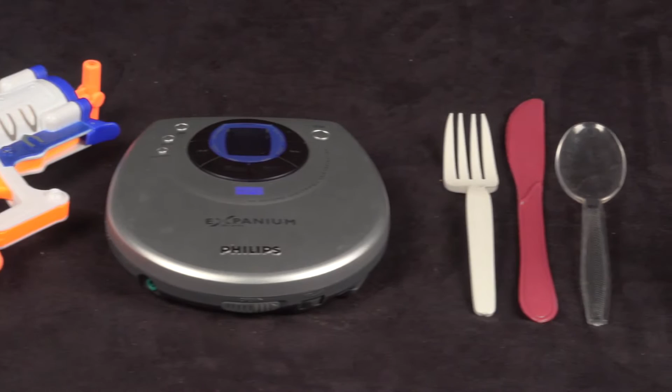Injection molding is the most common method for mass manufacturing plastic products. Examples include chairs, toys, cases for consumer electronics, disposable cutlery, and my favorite, Lego bricks.

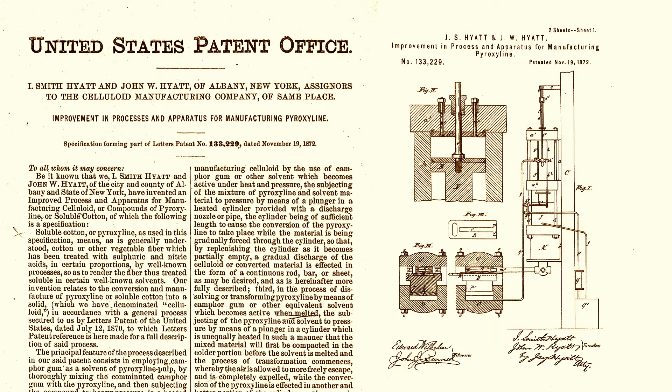Injection molding was invented to solve a problem for billiards. In the 19th century, billiard balls were composed of ivory harvested from the tusks of African elephants. This devastated the elephant population, so a billiards manufacturer offered a $10,000 prize for a replacement for ivory. This spurred John Wesley Hyatt to develop one of the first plastics, celluloid, to create billiard balls. He patented an apparatus for molding products from celluloid. This apparatus was the birth of plastic injection molding.

In principle, injection molding is simple. Melt plastic, inject it into a mold, let it cool, and then out pops a plastic product. In reality, injection molding is an intricate and complex process.

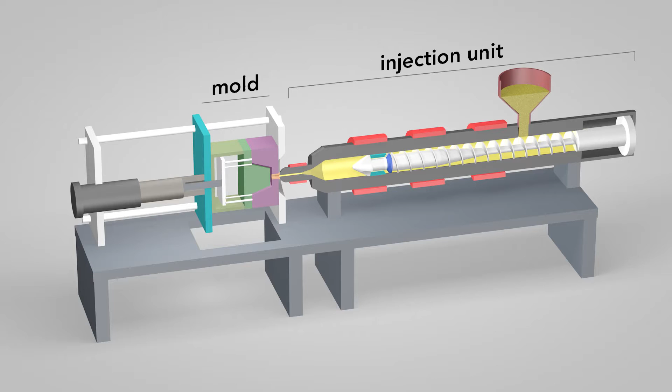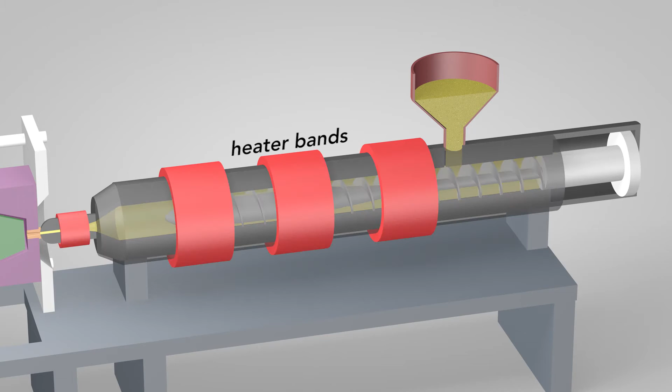An injection molding machine has three main parts: the injection unit, the mold, and the clamp. Plastic pellets in the hopper feed into the barrel of the injection unit. Inside the barrel, a screw transports the pellets forward. Heater bands wrapped around the barrel warm up the plastic pellets. As the pellets are moved forward by the screw, they gradually melt and are entirely molten by the time they reach the front of the barrel.

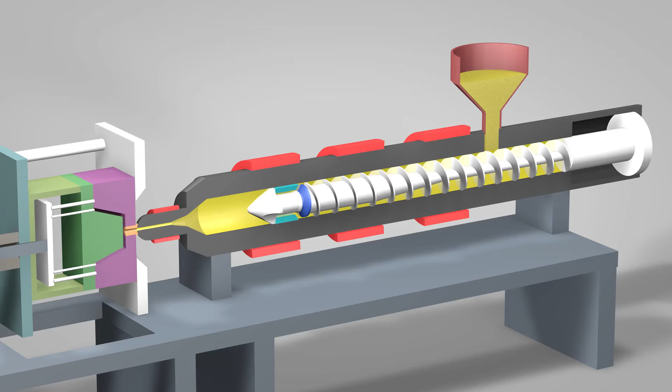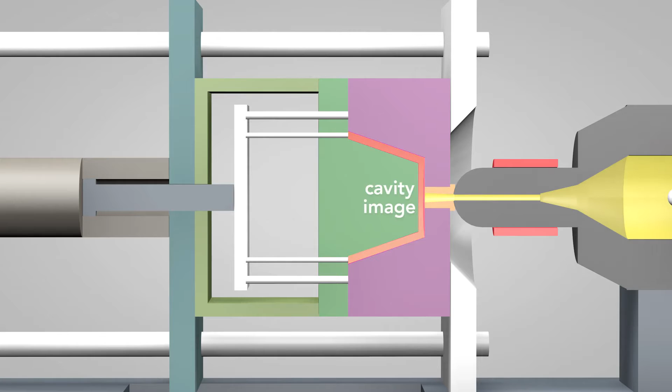Once enough molten plastic is in front of the screw, it rams forward like the plunger of a syringe. In a matter of seconds, the screw injects the molten plastic into the empty part of the mold called the cavity image. The plastic solidifies in under a minute. The mold opens and the part is ejected. The mold then closes and the process repeats.

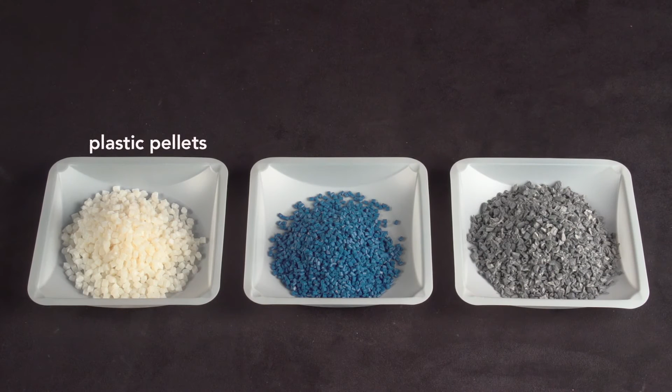All injection molded objects start with these plastic pellets, which are a few millimeters in diameter. They can be mixed with small amounts of pigment called colorant, or with up to 15% recycled material, then fed into the injection molding machine.

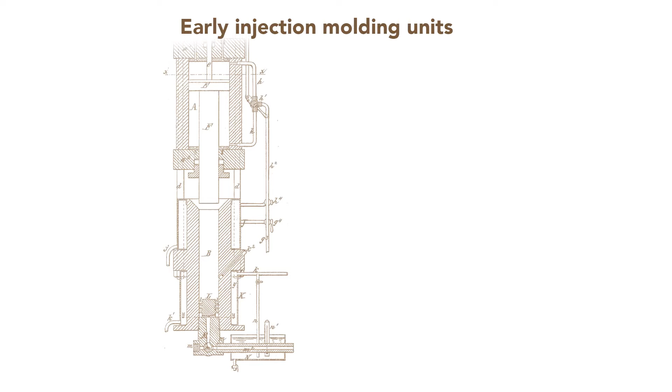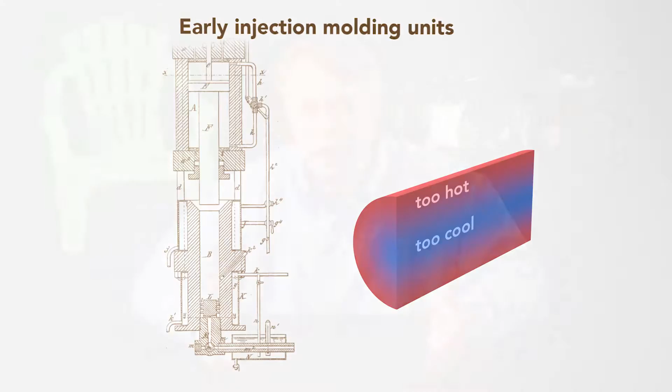Before the mid-20th century, injection molding machines used only external heating of the barrel to melt the plastic before a plunger injected the molten material. But because plastic conducts heat poorly, the temperature was uneven in the barrel. Either the middle was too cool and not fully melted, or the outer regions were too hot and degraded the plastic. The solution was this: the reciprocating screw, often regarded as the most important contribution that revolutionized the plastics industry in the 20th century.

In the earlier plunger-style machines, plastic filled completely the cylindrical barrel. But as I showed you, the plastic was not at a uniform temperature. The reciprocating screw overcomes this in three ways.

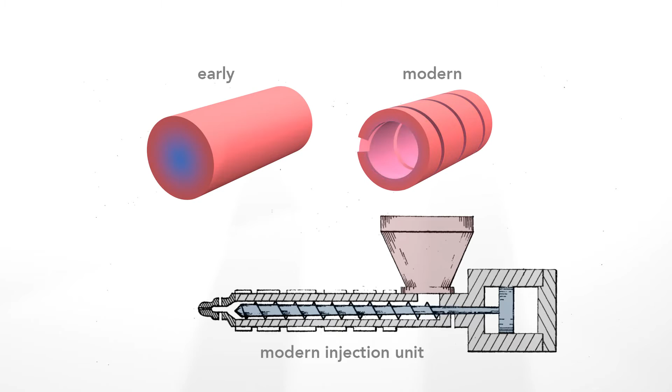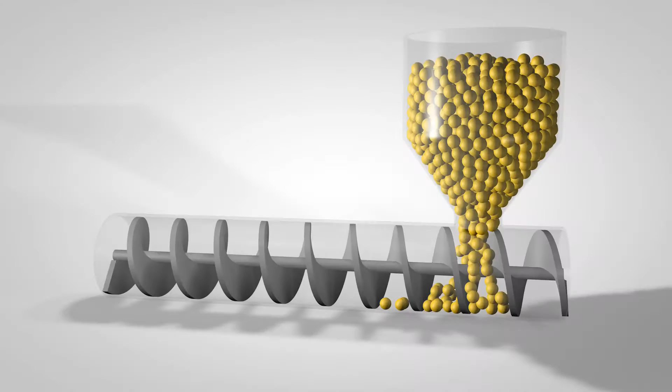First, in modern units, the plastic fills only the space around the shaft of the screw. This eliminates the cooler central region, leaving a thinner, evenly heated layer of plastic. Second, the screw has flights that wrap around the shaft. As the screw rotates, the flights transport the raw material forward through the barrel. The flights also serve to mix the plastic. The screw action agitates the melting pellets within the flights to create a uniform mixture.

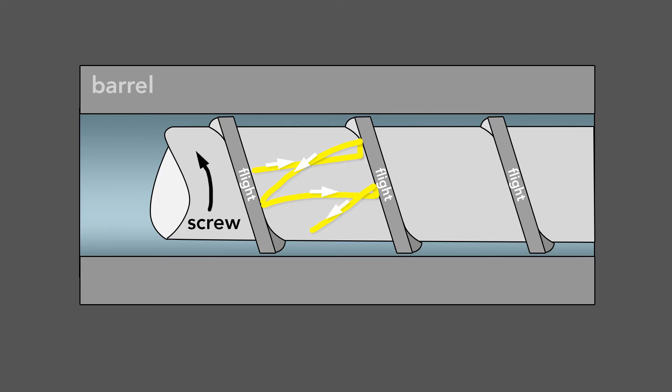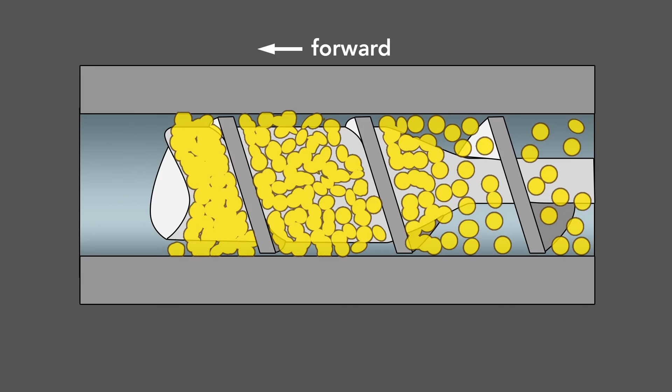Third, the screw action itself heats the plastic throughout. The shaft's diameter increases along the screw so that the distance between the wall and the shaft decreases. The flights then squeeze out air as they move the plastic forward, and they shear the pellets and press them against the barrel's wall. This shearing creates friction and so heats the plastic throughout. This screw-induced shear supplies a majority of the heat needed to melt the plastic, between 60 and 90%, with the rest from the heater bands.

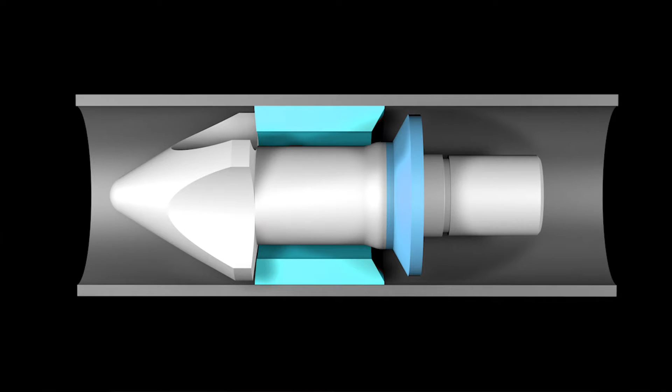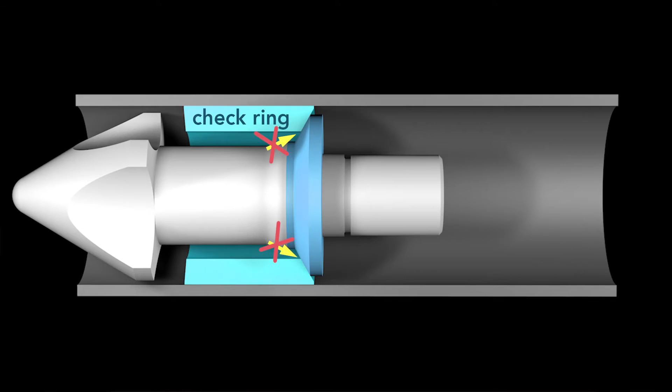The molten plastic flows past the front of the screw through indentations or flutes. When there's enough plastic to fill the mold at the front of the screw, it rams forward like a plunger, injecting the plastic into the mold. The plastic cannot flow backwards because when the screw pushes forward, a check ring is shoved against a seat ring to block the backwards movement of the molten plastic. This forces the plastic into the mold.

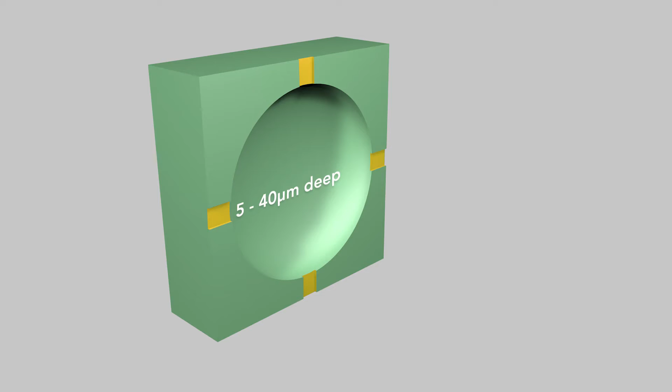Initially, the cavity image is filled with air. As the molten plastic is injected, it forces air out of the mold, which escapes through vents. These vents are channels ground into the landing surface of the mold. They're very shallow, between 5 and 40 microns deep. The plastic, which has the consistency of warm honey, is too viscous to flow through the narrow vents.

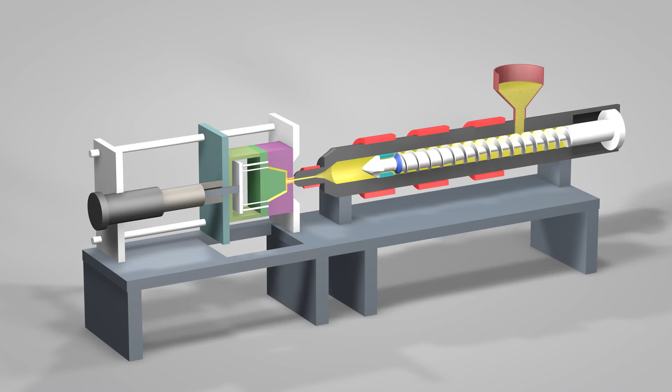To speed the plastic solidification, coolant, typically water, flows through channels inside the mold just beneath the surface of the interior. After the injected part solidifies, the mold opens. As the mold opens, the volume increases without introducing air, which creates tremendous suction that holds the mold together. So at first, the mold slowly opens several millimeters to allow air to rush in and break the vacuum, and then the mold quickly opens the rest of the way so the part can be removed.

These precision machined steel molds can cost hundreds of thousands of dollars. Removing the part from the mold can be difficult.

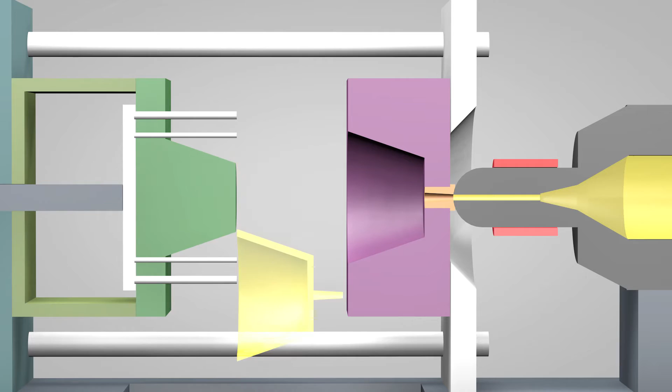When the plastic cools, it shrinks and becomes stuck tightly on the core half of the mold. Molds have built-in ejector pins that push the part off the mold. The ends of the pins sit flush with the core half of the mold, but are not perfectly aligned. Sometimes they protrude or are indented slightly.

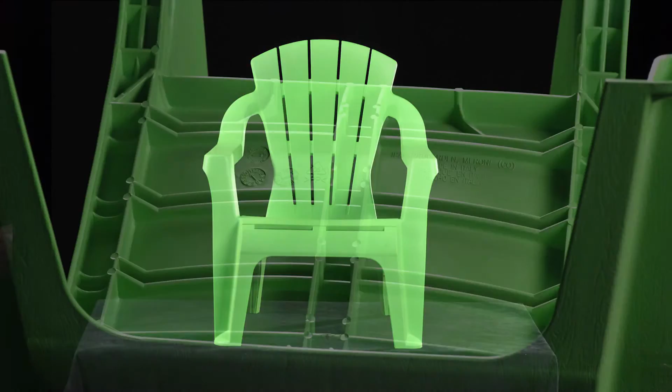So, if you look closely, you will see circular ejector pin witness marks on molded products. For example, this chair, on its bottom, has an array of witness marks.

When the part drops from the mold, an operator has to remove the sprue, that section of plastic that connected the injection unit to the mold. Sprues are manually twisted or cut off the part. Sprues are attached to objects only in molds that make a single part at a time, like a chair.

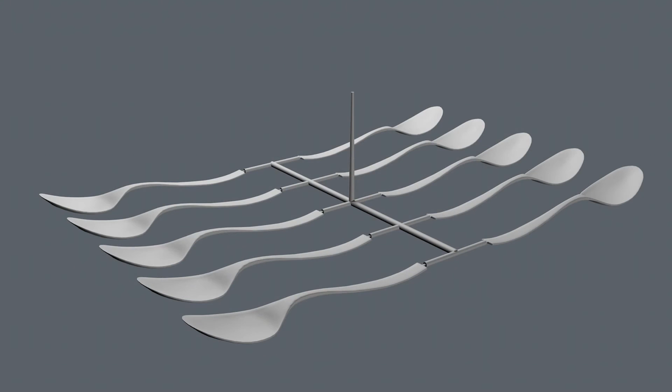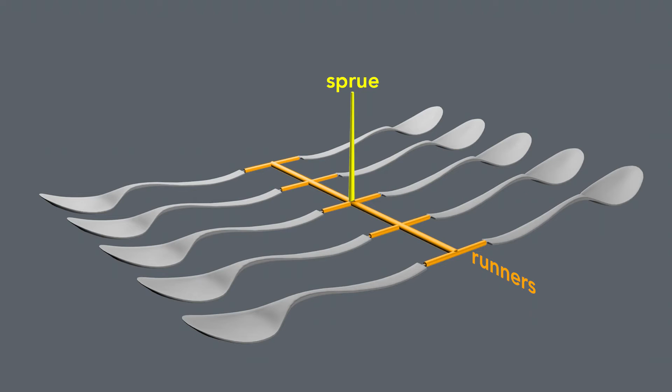Smaller objects are made in multiples in a single mold. In these, the sprue connects not to the part itself, but to a network of distribution tunnels called runners. The runners fan out from the sprue and connect to each cavity in the mold via a small, typically rectangular, entrance called the gate. You can see the gate on plastic cutlery.

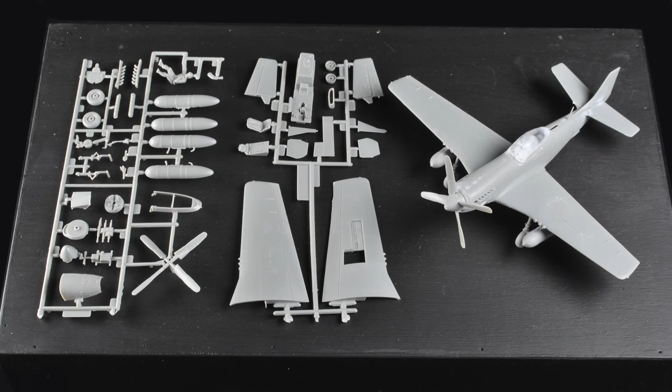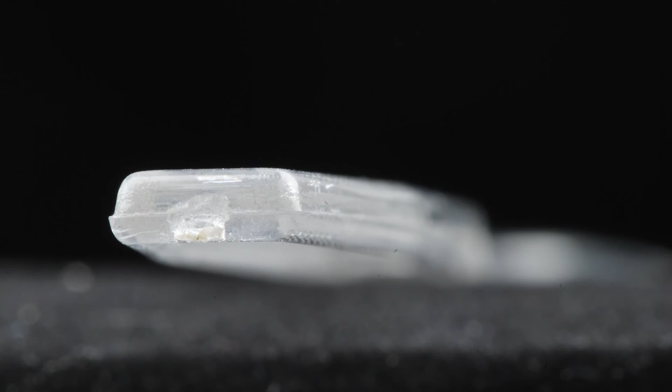The parts for model planes typically come still attached to their runners. Molds always have at least two parts, and where the parts of the mold meet is called the parting line. Here on this piece of cutlery, you see the parting line along the side of the fork.

When mold halves close, they are never perfectly aligned, nor do they have sharp corners. This creates a noticeable parting line on the molded object.

Another very important aspect of mold design is the draft angle. If a part has walls that are exactly 90 degrees, it will be very difficult to eject because its inner walls will scrape the core half of the mold. Also, the vacuum will be difficult to break because air cannot readily enter.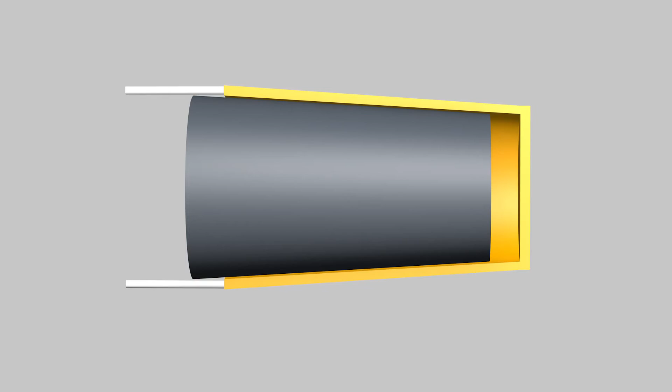However, if the walls are slightly tapered, even just 1 or 2 degrees, it becomes much easier for the part to be removed because once the part moves slightly, the walls are no longer in contact with the core half and air can rush in.

One impressive example of injection molding is the Lego brick. You can see the injection point in the middle of a stud, but this is not from a gate or a sprue. The Lego molds use hot runners.

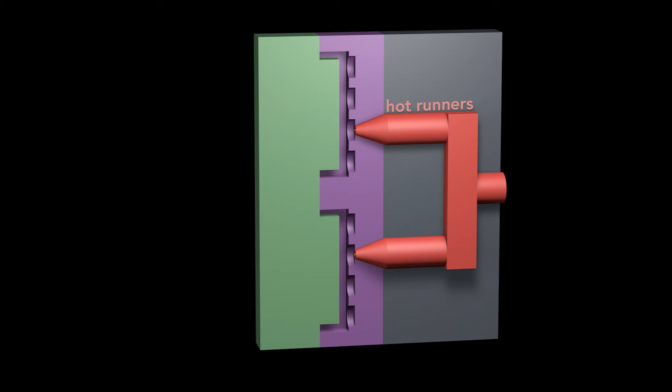Hot runners are a heated distribution network. This keeps plastic inside the runners molten while the plastic in the mold solidifies. This leaves no gates or sprues to be removed. The molded bricks are ejected, ready to use. The downside is that this setup is more expensive than a traditional cold runner system.

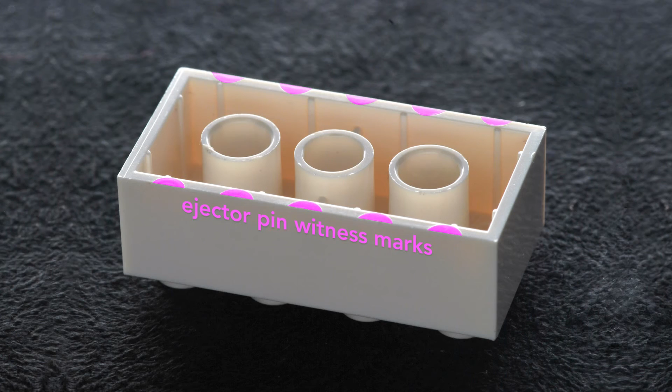On the bottom edge of the brick, you can see ejector pin witness marks. And what's most clever to me is where Lego designs their draft angle.

The outside of a Lego brick must be square. So if you cut a Lego brick in half, you can see that these inner supports are thicker at the top than at the bottom. There's a draft angle of about 1.5 degrees.

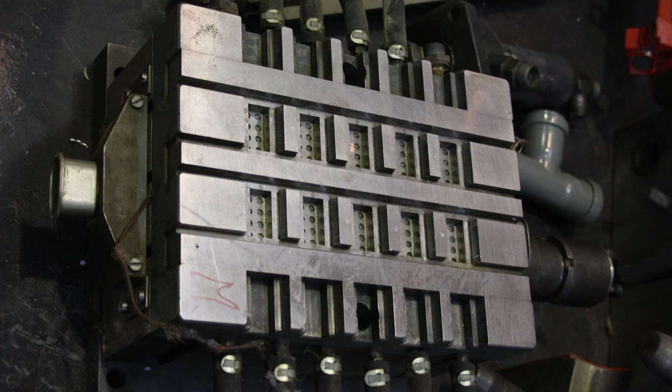This helps the ejector pins push the brick off the mold. The core half and the cavity half of Lego molds are designed so that the parting line is at the bottom edge of the brick. This hides the parting line.

Look around you and see how many injection molded objects you can find. Likely the device you're watching this on has injection molded parts. You should be able to find ejector pin witness marks and parting lines, but you may find something like this.

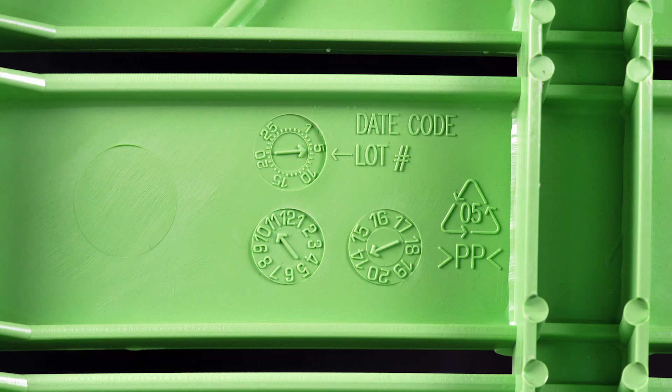It's a date wheel that shows the month and year the item was made. These are created by removable inserts and can be changed out for each run of the mold. They're very useful for tracking down defects.

So to return to where this all started, John Wesley Hyatt and his injection molded billiard ball did not win the $10,000 prize. His celluloid billiard balls didn't bounce quite right. But he did pioneer plastic injection molding, a thriving, continually evolving manufacturing process which creates many billions of products every year. I'm Bill Hammack, the Engineer Guy.